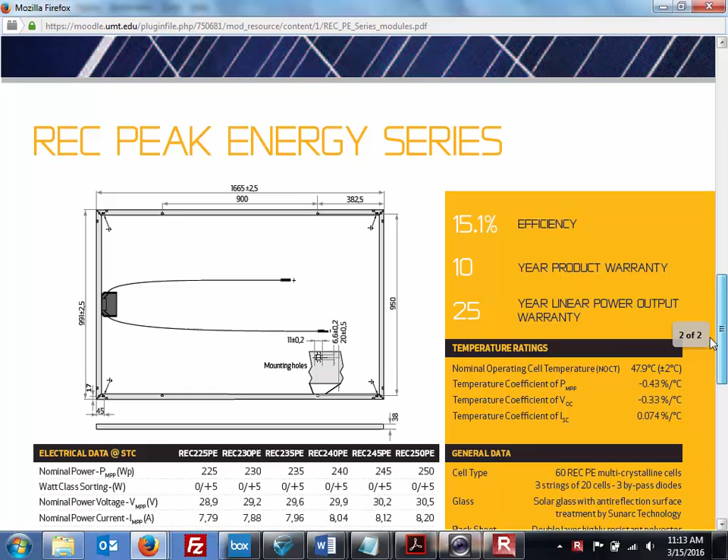So this is one particular, they call it high performance. This is a little bit old because it's only 15% efficient. A lot of panels are getting closer to 20. And like I said, in Japan there's a group pushing 50.

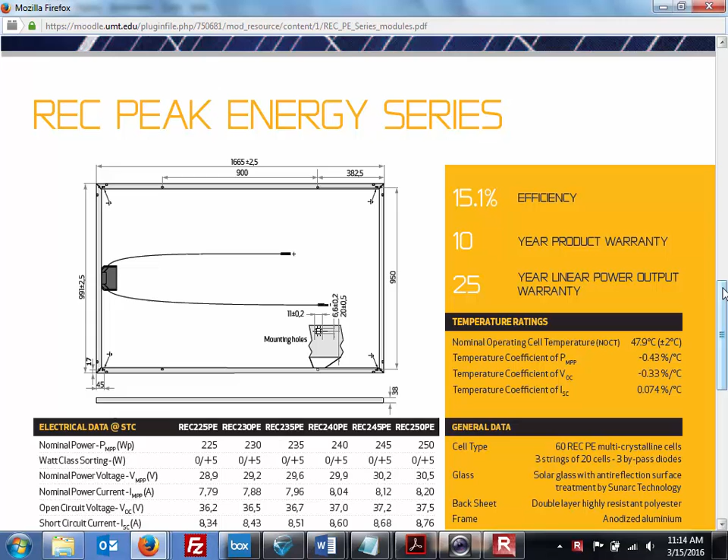25-year linear power output guarantee. So let's just see, when they say linear, let's see what their losses are per year.

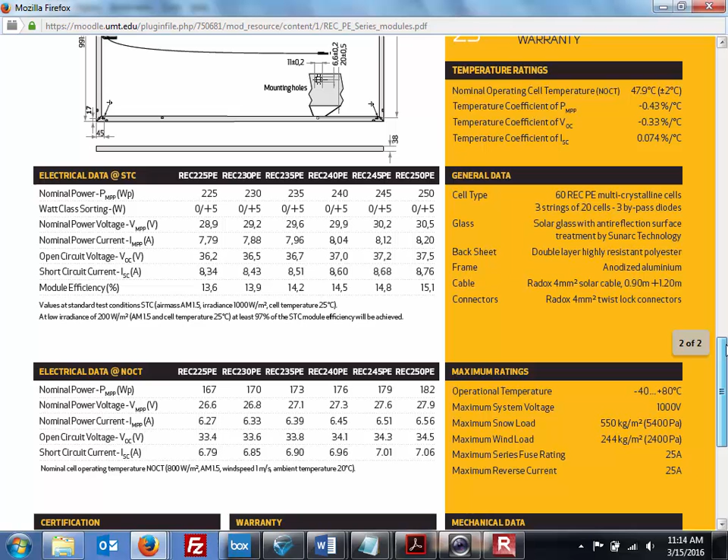So normally you don't have to worry about that. Temperature coefficient, so you're going to lose 0.43% per degree Celsius, or gain 0.43% for every degree below 49 or 47.9 you get. And this is how they partition those two. So most of the drop is coming in voltage rather than in current.

Okay, so they got three strings of 20 cells with 3 bypass diodes. So the diodes, again, don't let the electricity flow back into the panel.

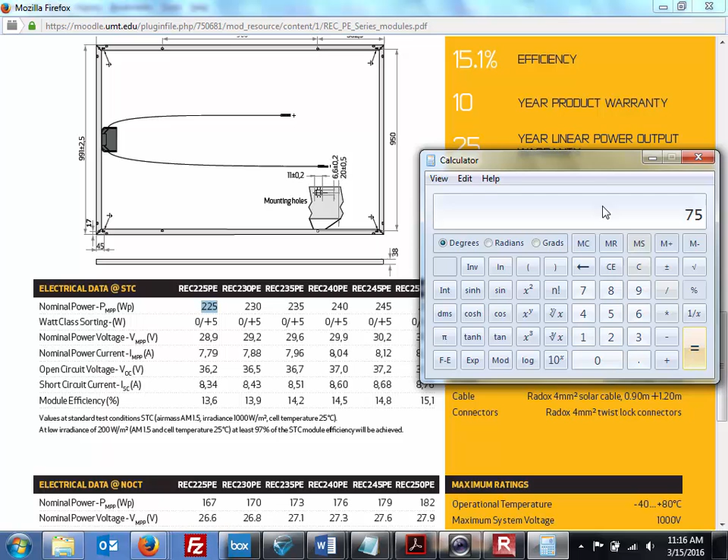And if we're looking at the power, so if we just look at this guy, 225, we can sort of see how many watts each one of the cells is doing, right? So 225, they got 3 separate strings in there, 225 divided by 3 equals 75 watts per string, 20 cells, 75 divided by 20 equals, so each little cell can do 3¾ watts.

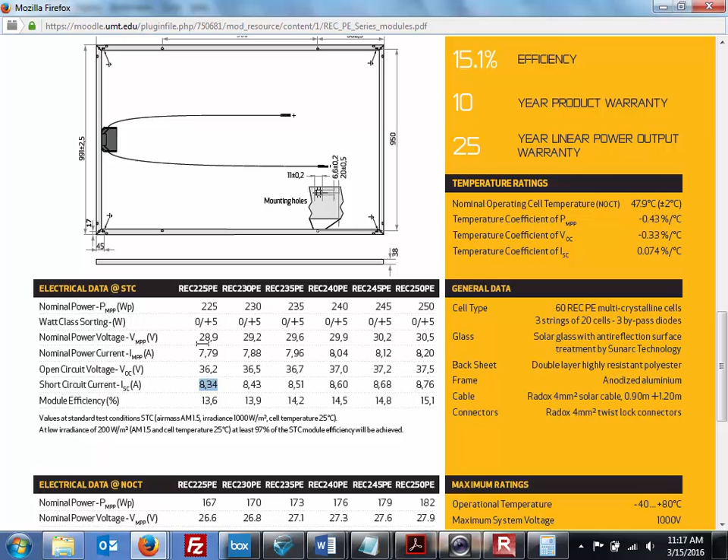So here's the nominal voltage, nominal current. Obviously the open circuit voltage is higher than that. The short circuit current is greater, but these two numbers multiplied together, the 28.9 times 7.79, that's how you're getting your 225 watts.

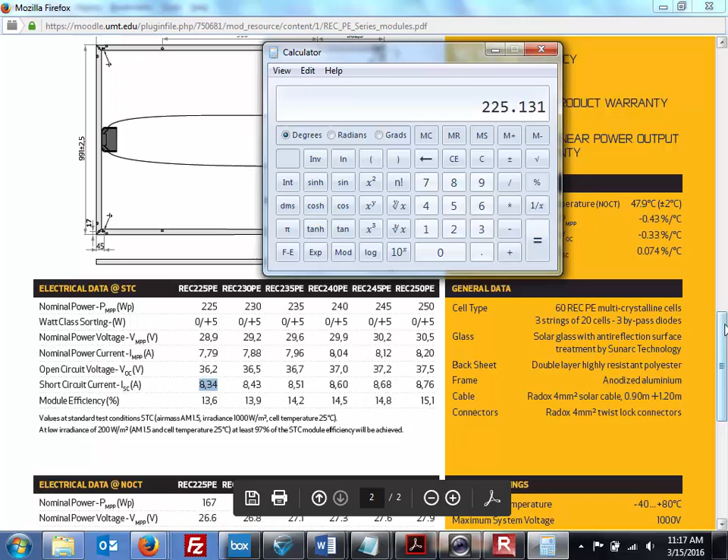Okay, and so some of them are down around 13.6. The reason you see the comma there instead of a period is because this is European. Europeans use commas instead. Okay, and there's that for a few other.

Oh, this guy, maximum snow load, 550 kilograms per square meter. That's a lot. Yeah, that's 1,000 pounds of snow on 1 square meter, which, if it was water, that basically means a cubic meter of water weighs 1,000 kilograms, so you could basically put a foot and a half of water on top of the panel and it would be okay. And if snow is, I don't know, 20% the density, you could put 5, 6 feet of snow on top of the panel and it'd be okay.

Well, they had pictures of a car parked, like a panel under each wheel. Yeah. So typically not an issue. Maximum wind load.

Now the wind load is given in pressure rather than wind speed, but you can use Bernoulli's equation to solve that. I'm not going to go into it, but Bernoulli's equation gives you the relationship between pressure and velocity. So you can back out, if you know the velocity, you can find the pressure.

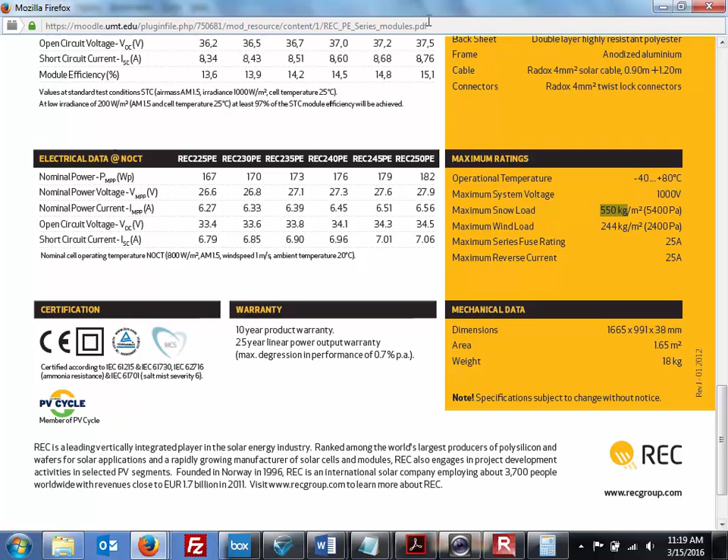Okay, so that's panels. Inverter specs, let's take a look at these. The Sunny Boy. Very popular. SMA, Sunny Boy, 3,000, 3,800.

We've got an inverter just right next door. We've also got one out in our solar trailer. It's I think a much older version of the Sunny Boy.

Okay, UL is the Underwriters Laboratory. IEEE is the Institute of Electrical and Electronics Engineers. These codes, 1741 and 1547, you can go look them up, and that basically says what the performance has to be in terms of insulation, safety, color, dimension, materials, performance, everything.

96.8 peak efficiency. That means, where's the rest of it going? Well, it's going to heat, because electrons flow through the thing and it gets hot.

Opticool active temperature management system. I don't know exactly what that means, but it's more than likely some fins, some radiators in there, and perhaps some fans. Galvanic isolation, that basically means you're going to touch the outside, you're not going to get shocked.

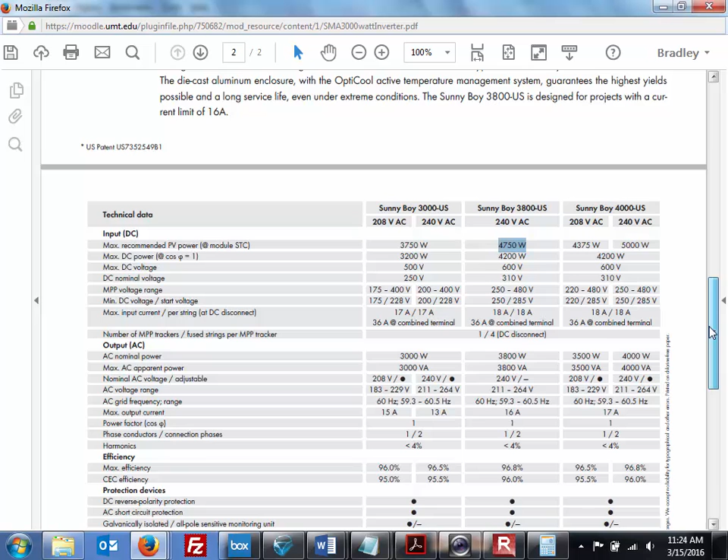And I will admit, I am not familiar with every single one of these specs.

But what you're going to want to do is say, hey, you'll go to the permitting agency, pull this and say, this is the specification that this particular inverter uses.

This is kind of cool. You can do the RS-485 cable or Bluetooth, so you can actually have information sent to your handheld device with that.

Looks like there is a little bit of consumption at 100 milliwatts at night, just to kind of keep the brain alive.

I didn't realize this until very recently, teaching 214, but the grid will dynamically adjust its frequency based on demand. So if there's all of a sudden a little higher demand, the frequency goes up. It's like, oh, you need more energy? Okay, here it comes with frequency. If it goes down, the grid will diminish its frequency.

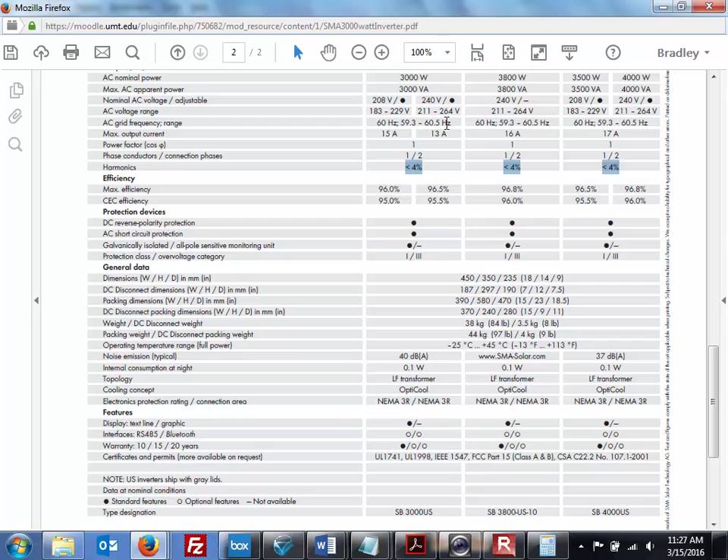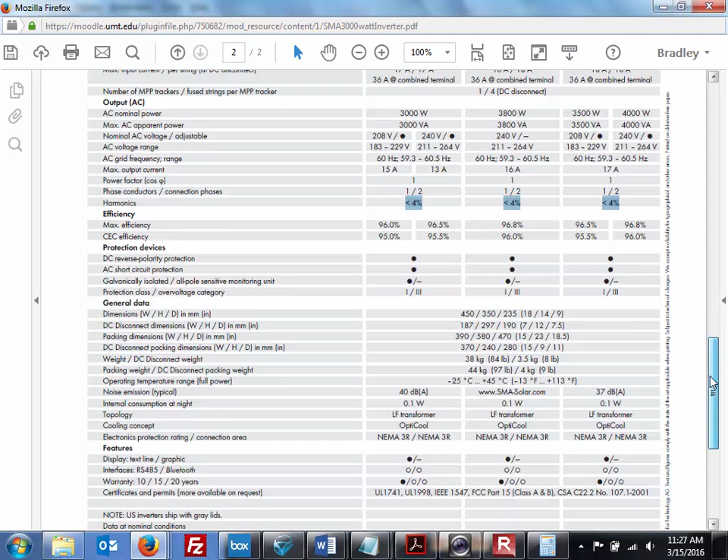And that's a pretty tight range on the efficiency, 96 to 95. So there's your specs, and when you get to sizing the system, you have to take that into account, based on what the customer electricity demand is.

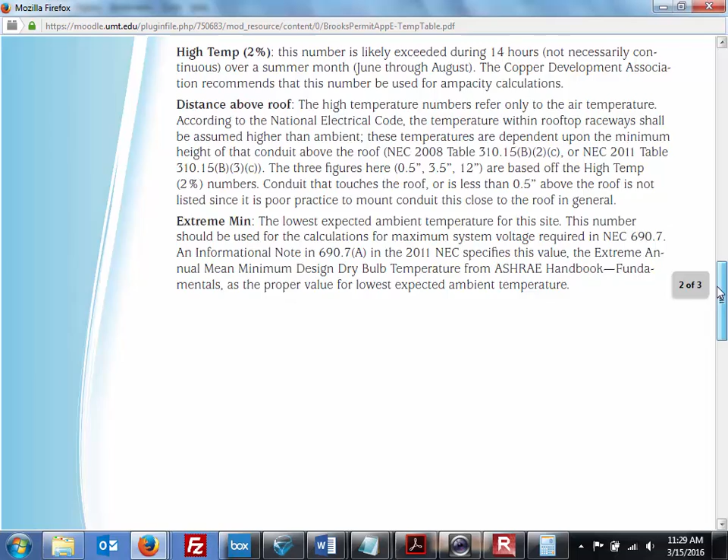So here's Minnesota, here's got Montana. Okay, elevation, high temp, low temp, distance above the roof.

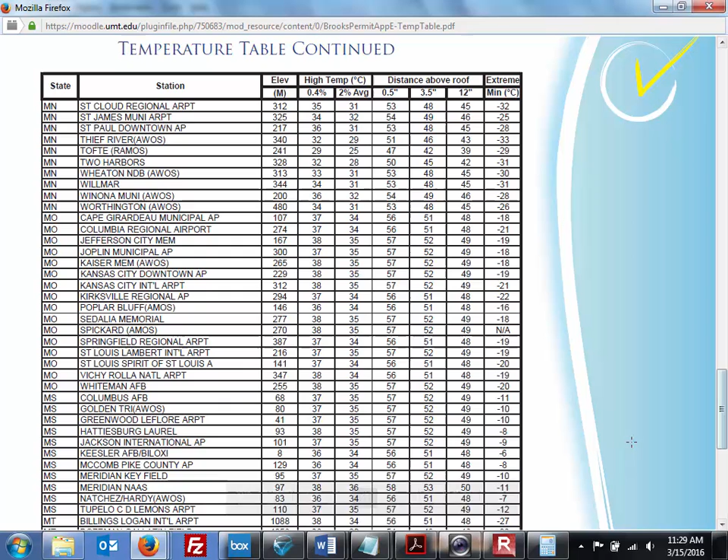Yeah, so check this out. Let's just go down to Billings, and you can see if your panels are closer to the roof, they're going to be a lot hotter than if they're 12 inches off the roof. So just like that little experiment I told you where we got the fans going to cool them, makes a difference. Airflow, that access to airflow.

Even just yesterday, we were down at, and if you guys want to tag along, a week from Monday, Brian Jackson and I hope Brian Kearns are going to be down at Bitterroot Valley Greens firing up the Biomax, or at least looking at what needs to happen to fire up the Biomax. So if you guys want to get in on that, let me know, and I'll put you on that little expedition.

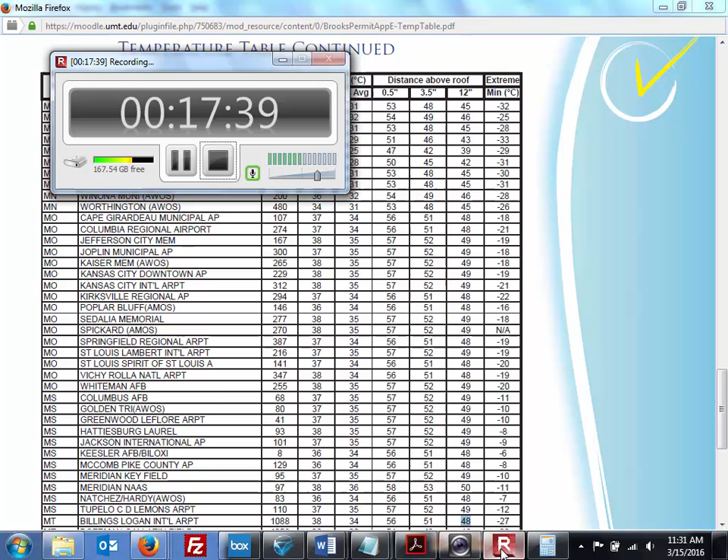Jackson has a 55,000 square foot set of greenhouses, and he's always working in harmony with nature as much as possible, because he's got to keep the temperature relatively consistent. You can't go too cold or too hot, or you kill your plants. He was using a temperature bath as an experiment, because water has a better heat capacity than air. A gallon of water holds a lot more thermal energy than air does. He's got a big pool inside his high dollar crop greenhouse just to dampen the temperature fluctuations. He was doing something similar in a little bowl of water with a coil heater sitting on the concrete ground, which also has pipes running through it to regulate the temperature.

He was finding in this one tiny little dog dish sized water a 20-degree temperature gradient, just in this little dish. So what he wants to be doing is entropicizing, or mixing that water, so it's all kind of the same temperature. It's the same thing as taking a bath - it's too cold, you turn the hot on, and then oh my God, your feet are burning. It's always amazing how great a temperature gradient you can have in a small body of water. Each one of these numbers is just one single point, and temperature, even though it's just a number, can fluctuate dramatically even in a small space. That's the take-home message here.

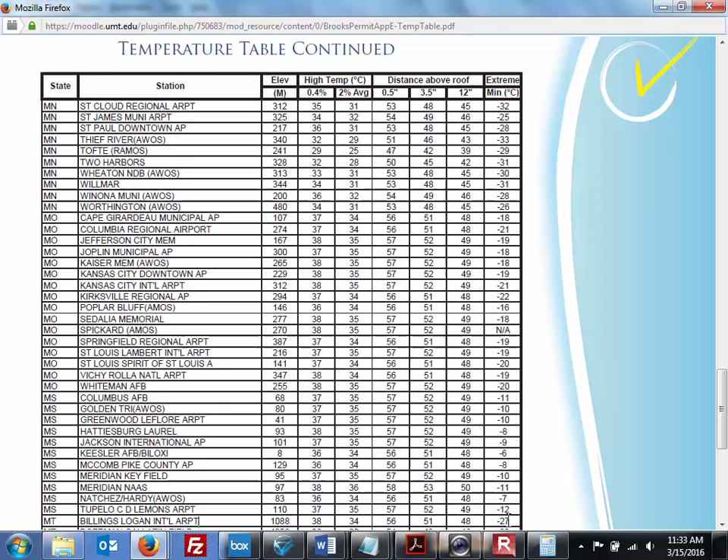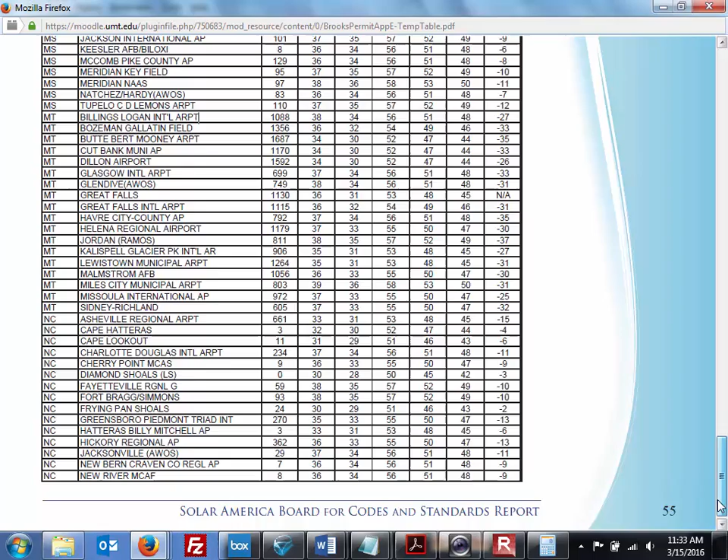So if we look again at Bozeman, their high temp is 36. Minnesota, I'm a little surprised their high temp is actually lower. Billings, extreme min 27. St. Cloud, Minnesota must be up there - it's cold, not too far north. They've got Missoula here too - came to the banana belt. And North Carolina. This is something he's compiled from a lot of different latitudes for temperature ranges.

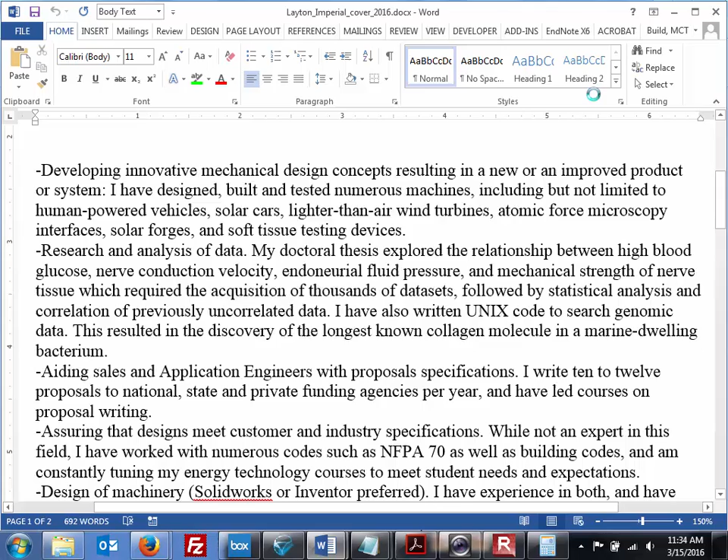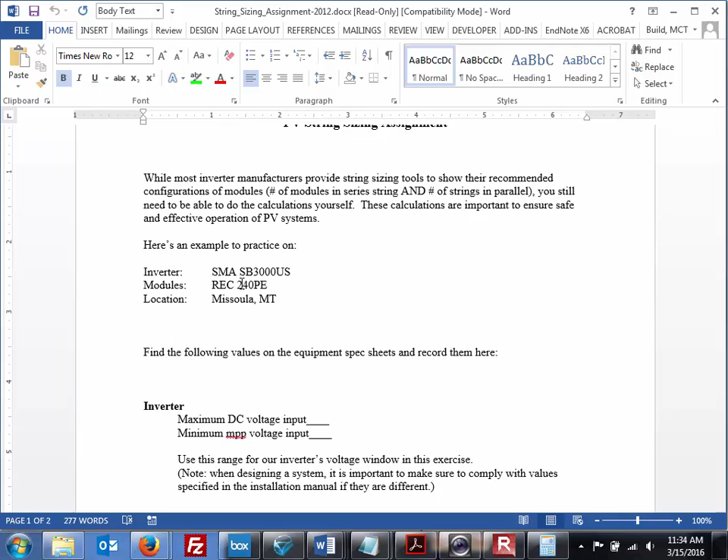Well, let's look at the string sizing assignment. There might be a couple calculations we need to do here. So we were just looking at that previously - we already looked at the inverter, we already looked at the modules, and we just looked at the location on those 3 PDFs. So from here, it's filling in these blanks. Do that before looking at the... let me get the answer.

Again, this is voltage open circuit, so it's a panel with nothing attached to it. What happens to the module voltage as temperature decreases? I'll let you answer that. What PV design temperatures for Missoula? You can look those up too - most of that's just stuff we looked up on those 3 PDFs we just looked at, yep. Calculate the maximum VOC. Show your work for partial credit.

So you'll want to figure out how the voltage changes as a function of temperature, and you'll come up with something. Let's just scratch your head on that a little bit. Okay, that's about it for this week. Take a quick peek at this guy - article on ungrounded PV systems.

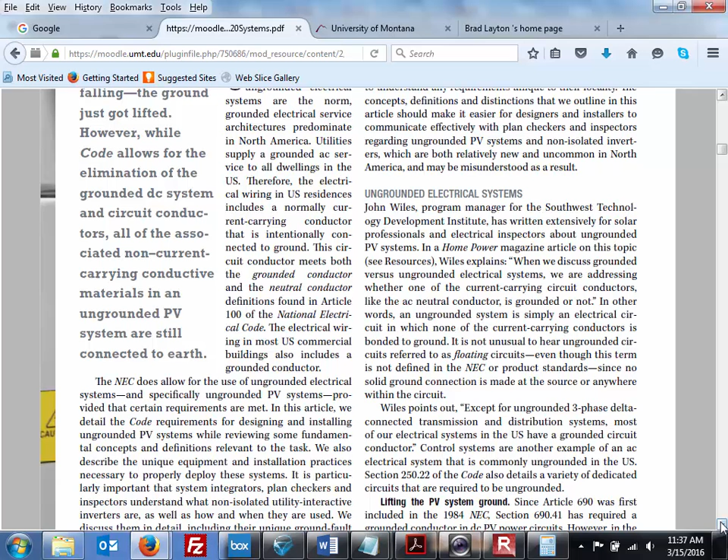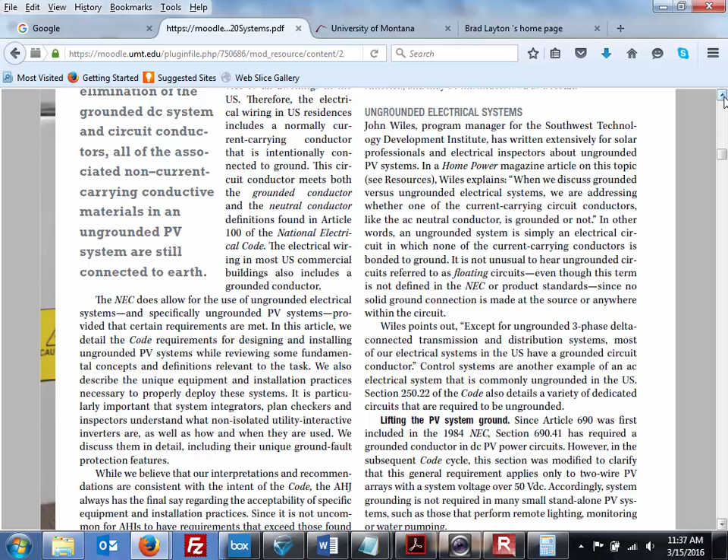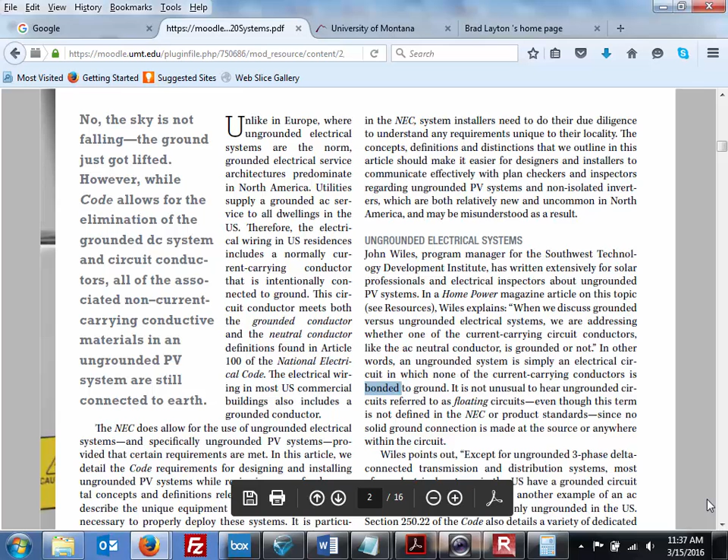I noticed the same thing in Japan - they did not have a ground switch on their outlets. One side was ground and the other was hot, and they're just using the ground as their neutral. The same thing is true if you go into a panel - the neutral bus bar and the ground bus bar are connected in your sub panel in your house. See, grounded conductor and the neutral conductor - versus an ungrounded one. What's the benefit of being ungrounded though? I don't know, I don't get it. When they say bonded to ground, that just means electrically connected to ground - as opposed to floating.

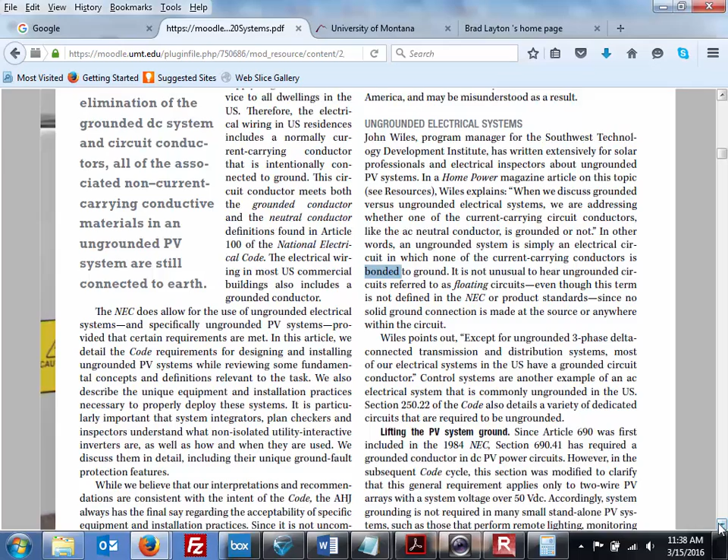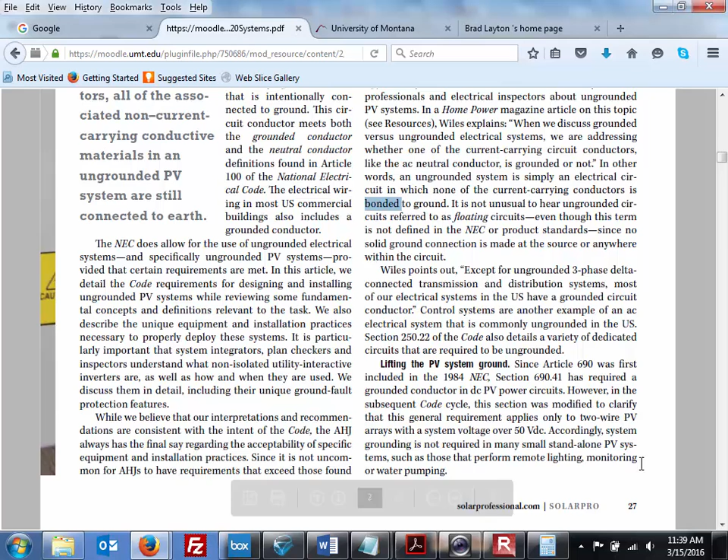I just dropped off some money down at the Missoula Federal Credit Union today, on the corner of Spruce and Orange, or Ryman. Yeah, Ryman. And the little parking meters are solar powered. I dusted the snow off one just to see if there might be some solar penetration through the snow. It's kind of fun - I asked Greg about that, and he said he's got that on his house, and it snowed after he first got it. He was going up there sweeping the snow off, and found out it didn't matter - it was like 1%, still plenty of light coming through. So he said rather than risk his life on a snowy roof...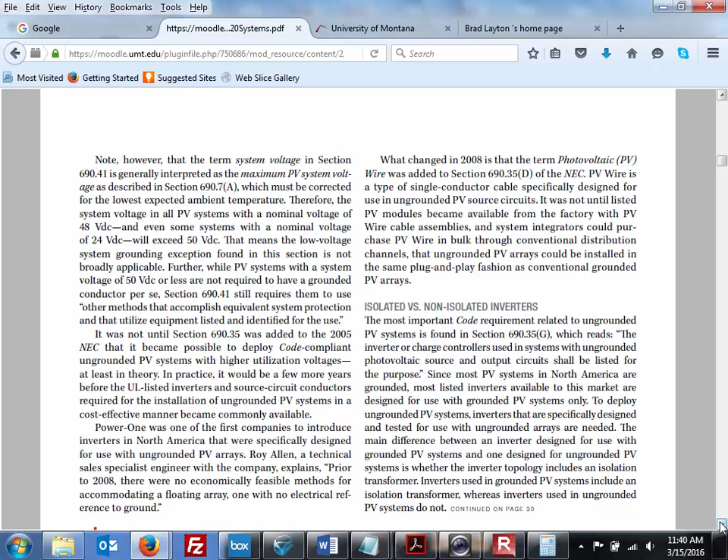Okay, so I have a question related to this. Where would you go to find the refractory characteristics of the glass that's on top of the panel?

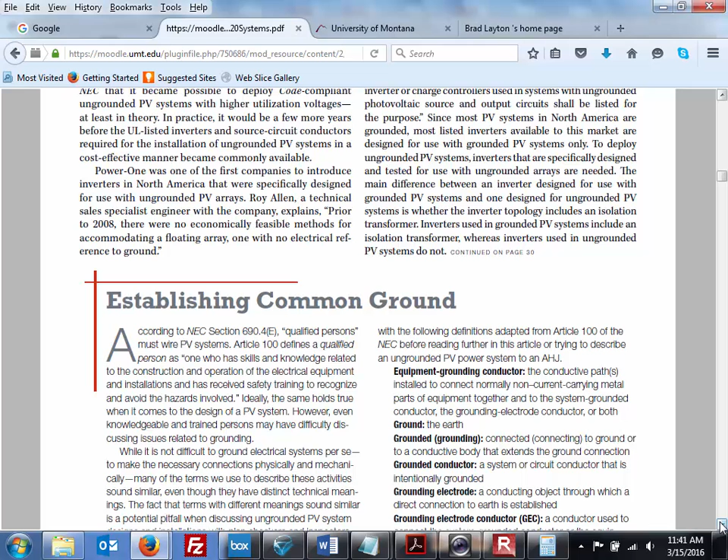So there's going to be three different specs for the glass. Let me dig through. Emissivity.

I assume you mean like how much light comes through? Yeah, yeah.

So there's emissivity, transmittance, and absorption. The panel's either going to reflect, transmit, or absorb the photon. And this must be at a given temperature. Yeah, so it's going to be a function of temperature, first of all. This is just given at 300 Kelvin.

Okay, let's just take a look at this. The emissivity coefficient, epsilon, indicates the radiation of heat from a gray body, according to Stefan Boltzmann law, compared to the radiation of heat from a black body.

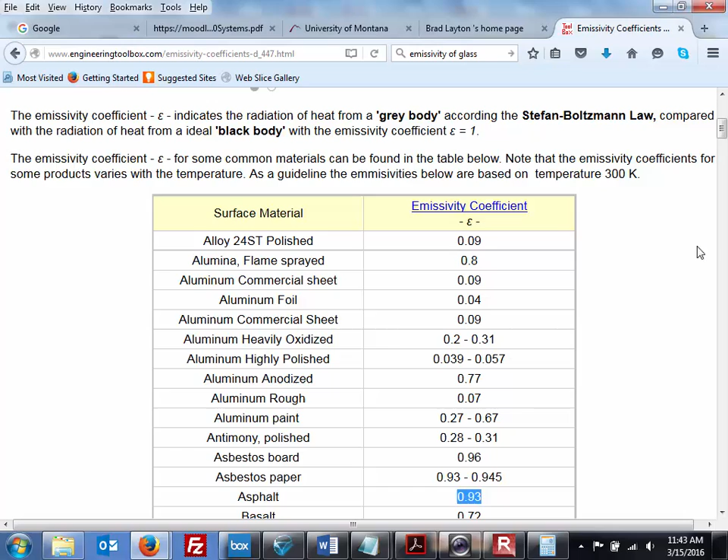Basalt, let's just get down here to some glass. So is this essentially the percentage of total radiation it absorbs, not specific to one set of wavelengths? This is going to be across the full spectrum. Yeah.

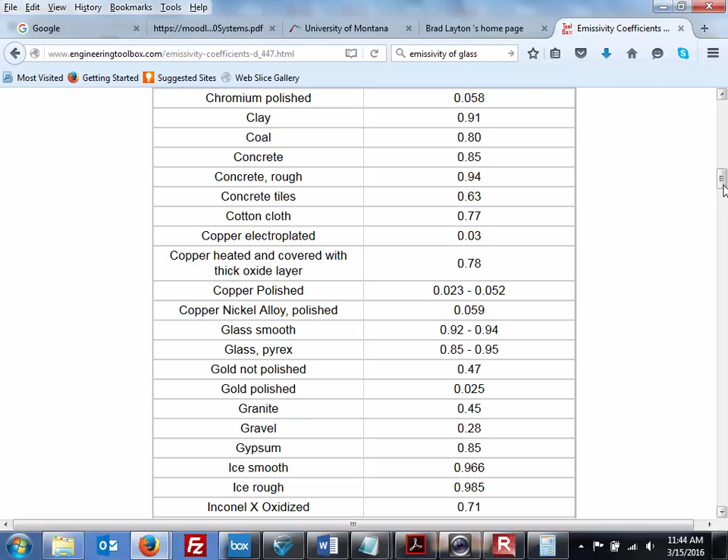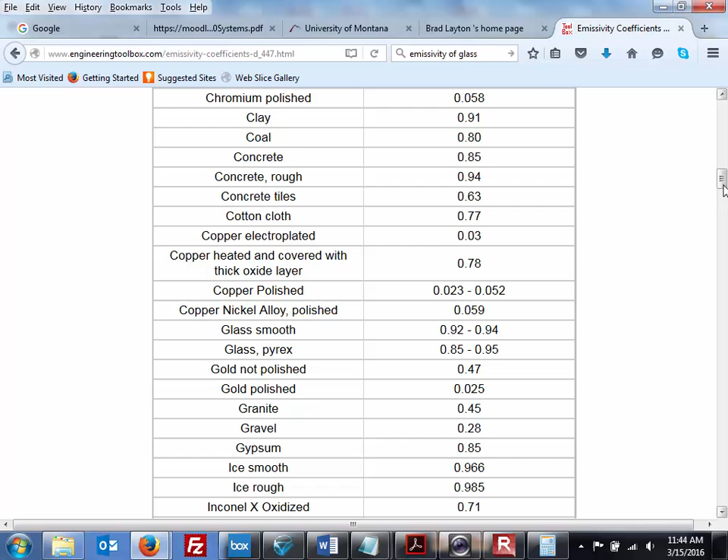So glass is sitting at 0.92, 0.94. Yeah, this is a lot. I don't look at this as much as I maybe should. Let's go look up at the black body matt.

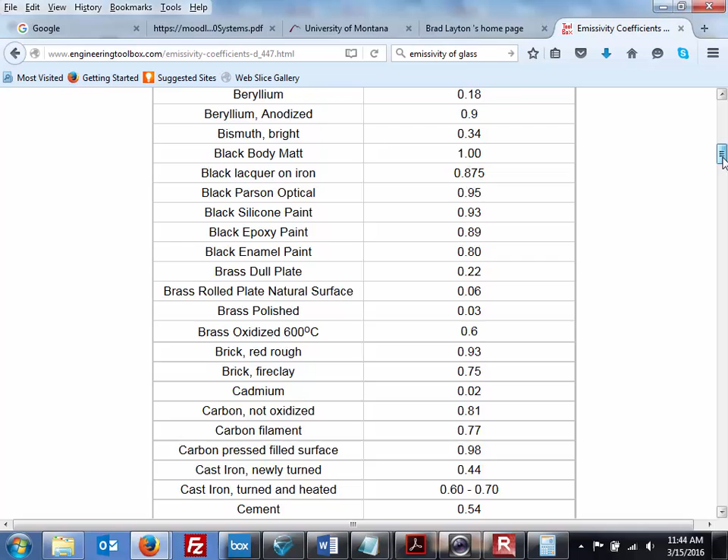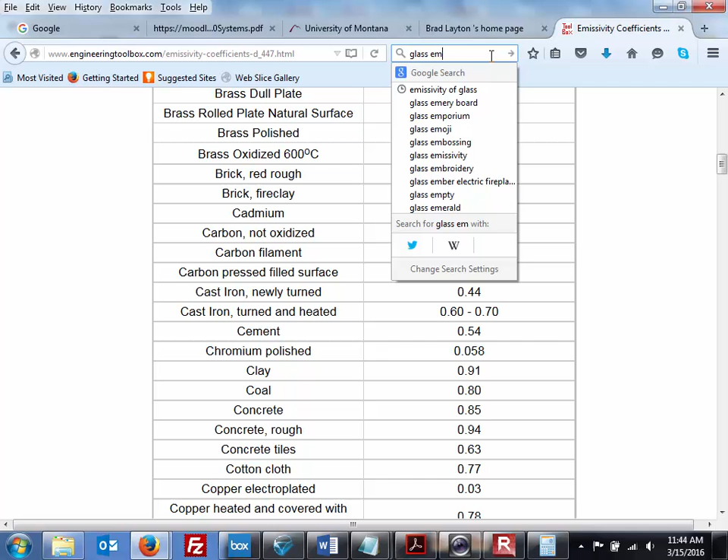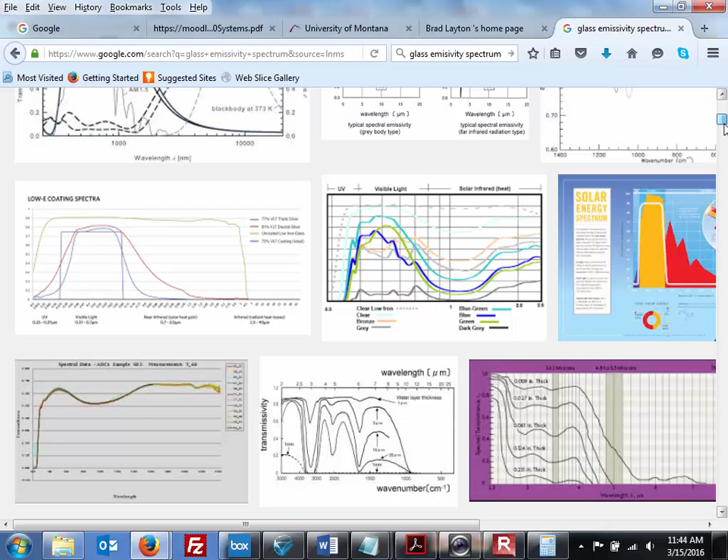So let's look up glass emissivity spectrum. It's easier for me if I look at it this way. Let's just look at this for a second. Low E.

So here we were talking before, visible light is, well, I just call it 400 to 700 nanometers. So this VLT is basically only going to let this amount of light through. The rest of it is kind of weird to think about, but it actually is kind of like a black body. Those other frequencies are reflected, so that's why once it comes through, all of these other frequencies bounce back off and stay in the room.

Uncoated, low iron glass has a much broader spectrum, so it's going to let everything through. And in terms of the total emissivity, it's a function of wavelength, and it's also a function of temperature. So I'm not 100% sure how you get from this curve to a single number, because the emissivity is a function of wavelength, and it might just be the ratio of the areas under the curves for the whole thing. That would be my guess, that's how I would do it.